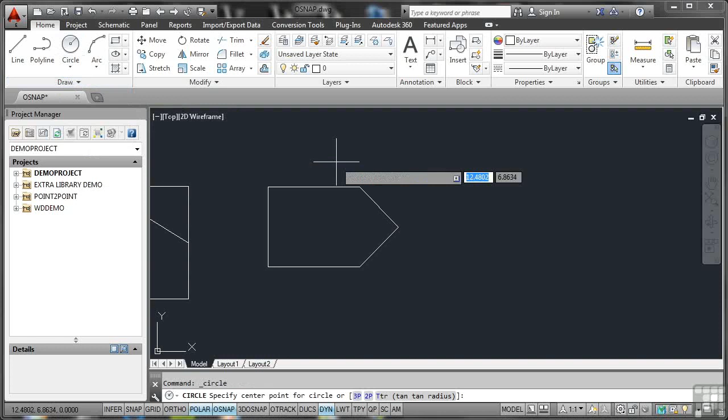I'm going to go to the circle, click on the flyout, and what I want here is center radius. When I click there, I get center radius, and there's the center point for the circle. I'm just going to draw it anywhere over here on the right—click and drag. I'll give it an exact radius of 1.5, because I know that'll fit on the screen nicely.

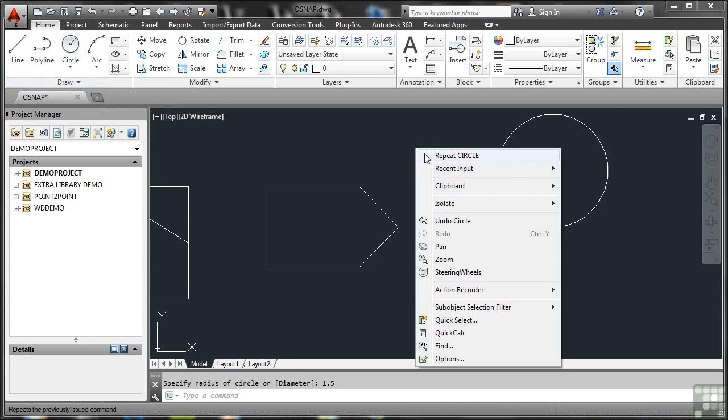Now if I want to draw from the center point of the circle, I can go to the line command—or right-click, recent input, line, much quicker. I can hover on the edge of that circle; I don't even have to go into the center to get the center snap. When I click now, there's my center snap, and I can drag that to an endpoint snap there, click, enter to finish. Not the most perfect looking drawing in the world, but you see how that works.

Now, circles also have another type of snap known as a quadrant. I might not have wanted to draw that line from the center snap to that endpoint there, so I'm going to delete that line, and use the quadrant snap—but this time using my override snap to do it, because quadrant snap isn't switched on in my object snap settings.

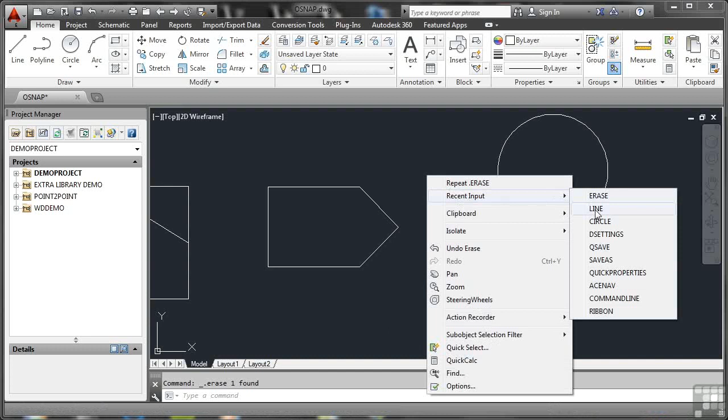So I'll right-click, recent input, line. Specify first point—I want the quadrant. I want this quadrant here on the left-hand corner, so to speak, of the circle. I know that sounds a little confusing, but you'll see what I mean in a moment. I'm going to hold down the Shift key on the keyboard and right-click on the mouse, and there is my shortcut override object snap menu.

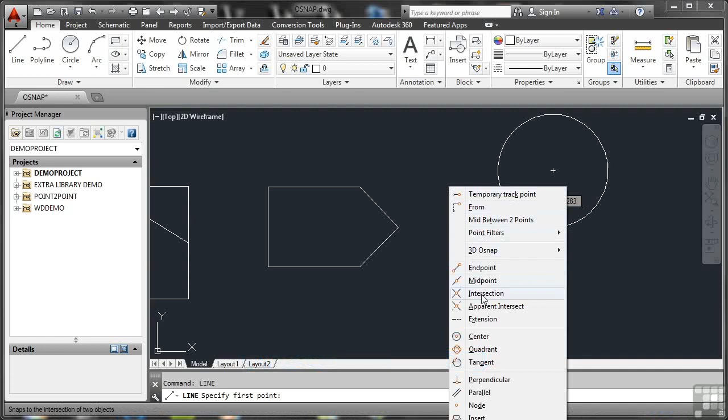Quadrant is just there—click on quadrant. There's my quadrant snap. Even though it's not part of my object snap settings, it's an override snap. I click there, go to the endpoint there, enter to finish, and I've drawn it slightly differently. So that's how useful those object snaps are—they are so important to draw accurately.

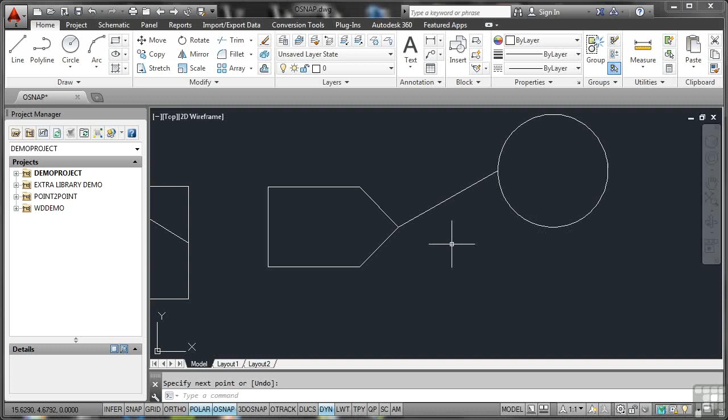So you'll notice now I've left object snaps on with the set object snaps that I've ticked in the box, and I will use those constantly as I draw in AutoCAD Electrical.

It's rare that we will need to do any 3D drafting in AutoCAD Electrical, but if we do, there is the opportunity to use 3D object snaps. These are down here, so if I switch them on, 3D object snap on the status bar, right click, and you can see that we've got some 3D object snaps: vertex, midpoint on edge, center of face, and so on.

If I go to settings, you'll notice I can switch those on and off. So we've got vertex, center of face. What I'm going to do is switch on midpoint on edge as well. I'll click on OK now, and you'll notice that 3D object snap is on the status bar.

Now I'm going to quickly draw a rectangle. That's up here on the draw panel, right here. Come into the drawing area, click to specify a corner point, and I'm just going to drag that like so, and make that rectangle say 4, then press tab and input 2, like that. So you're just inputting and tabbing between the two values in the boxes and press enter.

There's my small rectangle. Now what I need to do is change the view of that and go to what they call an isometric view to show you the 3D settings for this. If I go over here to the navigation bar and click on View Cube like that, it gives me the view cube, and I can click on a corner of the cube and it then shows me an isometric view. Can you see how the cube rotates? Now my rectangle is in isometric.

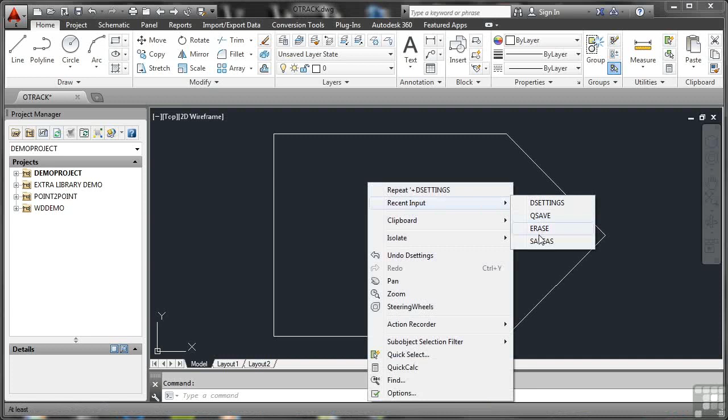If I right click and go to recent input, you'll notice because I've gone into a new drawing, there's no line or circle there. So I am going to have to go up to the ribbon this time to draw a circle. Remember that, new drawing, new settings on the recent input. Center radius, so I've done a circle center radius on the fly out there. It's asking me for the center point for my circle. If I hover over that midpoint snap there and don't click on it, that's the trick with OTrack.

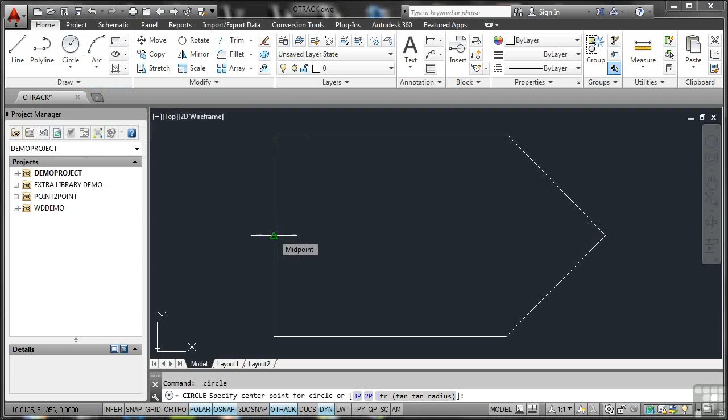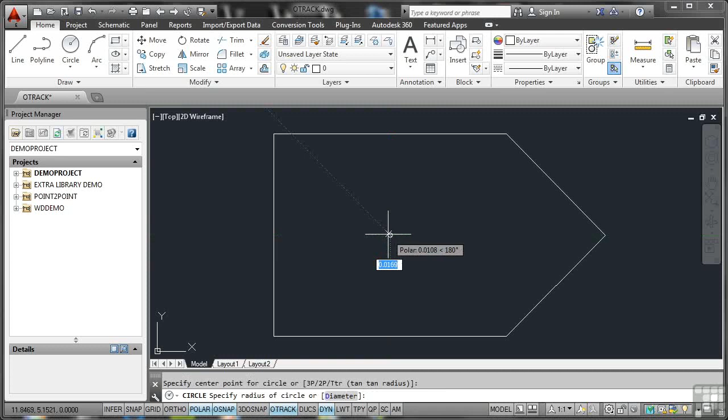You've got to make sure that you don't click on these object snaps. I'm going to go up to the midpoint on this line and hover there as well. As I drag downwards now, the polar tracking will kick in because I've got polar switched on - that's the green dashed line. But as I drag downwards, look, I've got a corresponding intersection of the other midpoint snap on the left. So if I now left click, that is the center of my circle. I'll make that 1 radius there, and there's my circle. So basically what I've done is added that circle for my symbol.

It's a very clever tool, OTrack. You use it in combination with OSnap. Now another one I could do there, perhaps I might want a much smaller circle here to indicate a point that I snap to. So what I'll do is draw another circle. The good thing is I can right click now and repeat circles straight off the shortcut menu.

Center point, I'm going to hover on that endpoint snap there, and hover on that endpoint snap there. I'm not clicking, you'll notice. As I drag to the left, there's the intersection right there - click - and I take that little circle there. I'm going to make that 0.05 as the radius. Only needs to be a small circle like that to indicate a snap point.

I can then use the center snap of that circle to draw my lines from and to if I need to. But as you can see, I've just made a perfect electrical label that might go as a tag somewhere on a wiring diagram, on a panel diagram, on a schematic diagram. So that's OTrack for you.

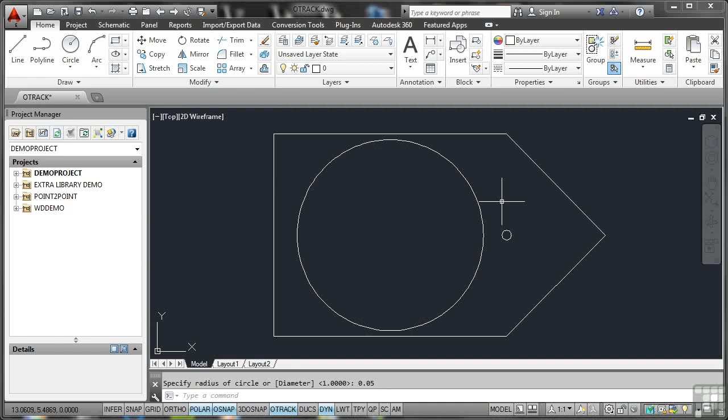Dynamic UCS, or DUCS for short, is again another 3D setting that we would use in our drafting settings. So what I've done, there's my rectangle, and I've set it up in an isometric view using the view cube. We'll quickly do an extrude again just to make it into 3D. We'll select our rectangle like we did before, press enter to confirm, and I'll drag that upwards and put the height of the extrusion this time as 1.5, just for a bit of change there instead of 2. And I'll pan that a little bit, like so.

Now, when I'm drawing in 3D, I might want to place something on a face of a 3D object, rather than on a corner or a midpoint or a vertex. So what I do is switch DUCS, Dynamic UCS, on. Now if I want to draw a circle on the center of this face here on the end, I can click on the circle command, center radius, and if I hover over that face, can you see it go dashed and highlight? So I can specify a center point for that circle on that face.

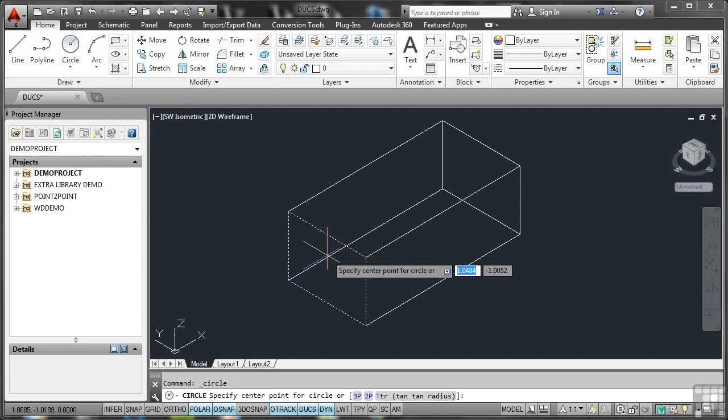And if I hover on that midpoint there, again you'll see regular midpoints still work. Hover on that midpoint and drag across. When I get those object snap tracking points in the center of that face, the circle is then drawn on that face. So if I make that 0.5, there's my circle on the center of that face there. I might use that for something like a press pull command.

So I'll type in press pull because I haven't got my 3D icons or settings up at the moment. And what I'll do is hover inside that circle and click, and I can drag another 3D solid out like that and press enter to finish. So you can see there that I can generate things very quickly on faces of objects using Dynamic UCS.

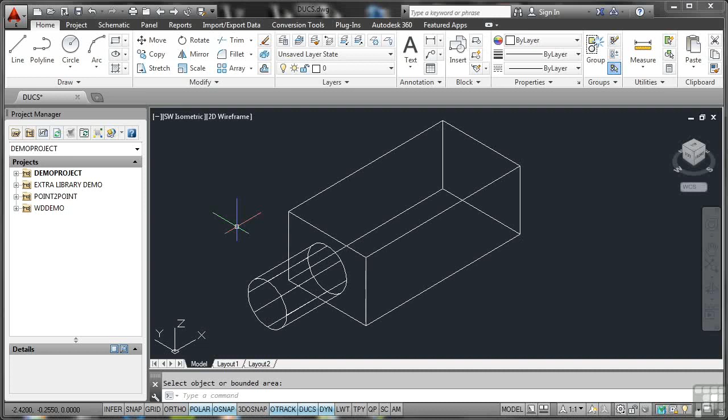UCS stands for User Coordinate System. So what you're doing is specifying dynamic user coordinates on the face of a 3D object. Again, we won't often use 3D in AutoCAD Electrical, but if you do, you now know that facility is there to use and you can use it at your leisure.